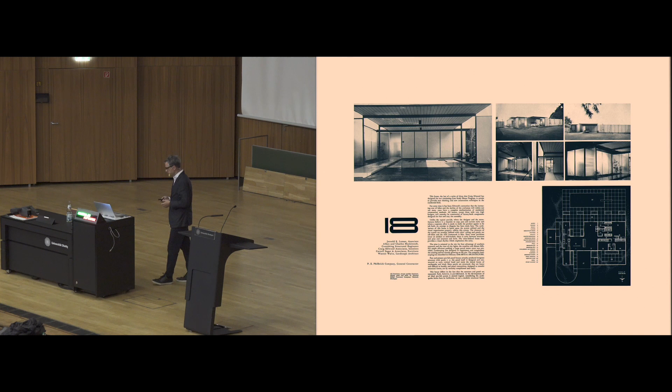We've forgotten that with architectural tools it's possible to design also tactile comfort, not only visual experience. This is something that in our case, I think we were very lucky when 15, 17 years ago we began to be concerned about sustainability and environmental responsibility. We were lucky in two conditions.

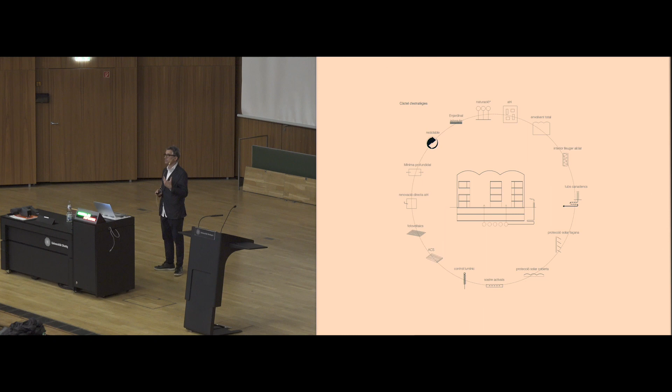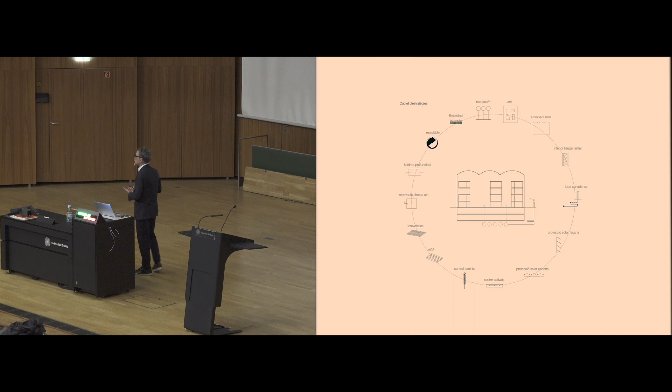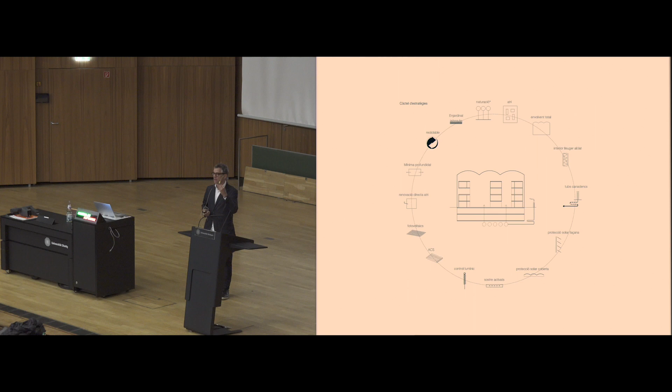On one hand, our clients were not rich enough to assume technological, efficient, sustainable solutions for our projects. On the other hand, our fees were so low it was not possible to get CFD simulations or thermodynamical simulations. That's why I think we were lucky, because thanks to those economical conditions at the beginning of the financial crisis in 2007, our only way to approach architecture with environmental responsibility was by using pure and simple architectural elements and tools.

First of all, how we use the buildings is the first sustainable strategy. It's something as simple as imagining that not all parts of the buildings have to have the same level of comfort, the same temperature, the same ventilation, whatever.

Second, a simple decision in terms of what kind of material and products we can use at that moment - not only bio-sourced materials and products, but also geographically available products very close to the site of our buildings.

Third, the use of passive strategies based on architectural decisions like geometry and material. Just by defining geometry and using specific materials with high amounts of inertia, we can get comfort based on architectural design. And if active systems are necessary, we try to always introduce those active systems into the elementary parts of architecture, like the structure or similar. This is where we are now, more or less.

But in fact, as you will see, we are really local architects. Our practice has not been far from the office - more or less half an hour by car. Well, it's not true for all projects, but maybe 90% of the projects are like that.

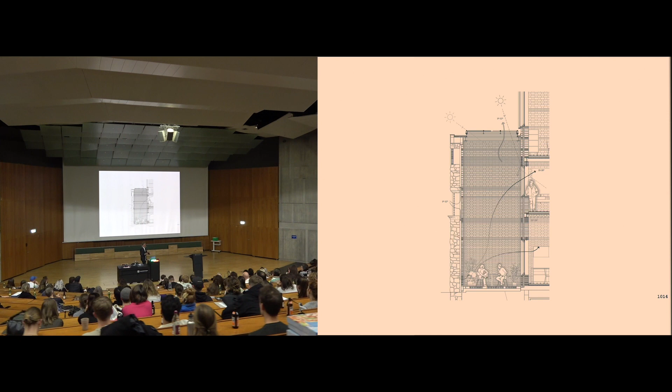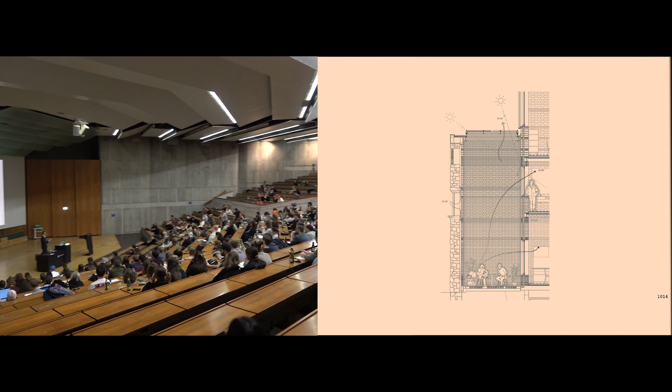In those local conditions, our thermodynamical strategies are based absolutely on the idea that the bigger the amount of inertia in our spaces, the more stable the temperature - and that needs, on the other hand, to cross that strategy with very strong and intense cross-ventilation in order to take off, at night, the amount of heat that the inertia has kept during the day. This courtyard is in a house close to the office, half an hour away, let's say.

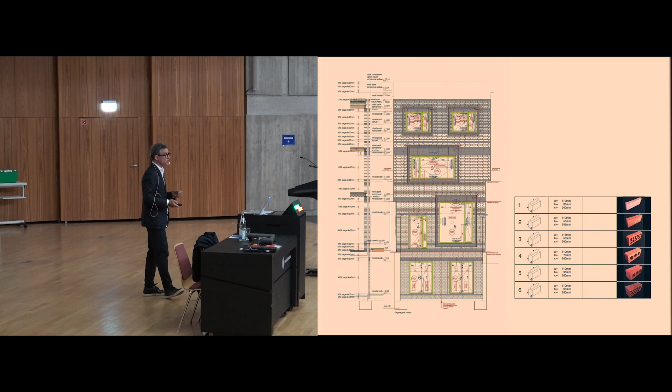From that former facade, we developed an atrium that is covered in winter and open in summer. In winter it works with a greenhouse effect, getting the sun gain. In summer the big, wide walls give a fresh and cool atmosphere to that space, which is not specialized, not highly defined by its function, but it's really special. It's a special experience because of the behavior, the material, the height. It also explains a bit the structural behavior, but that's not so important.

Also, the porch is a space for interdependence, a space where human experience is put in contact with what is happening outside of the house, not only because of the cross-ventilation, but also in the sense of a visual relation with what happens outside.

So porches, in plural, are also that kind of very special space that we've used in our projects, always in that strategy of making an intense experience based on natural conditions and comfort.

So in that sense, we believe so much in that kind of experience that it's not just a porch. In fact, in that case, it's the real sitting room of that house, which is a house for a real rich guy. But he assumed that the best place to be in winter and summertime was the porch. He's a guy who doesn't want a TV or whatever, so he was the perfect client. This porch works as a porch in summer and as a gallery in winter, but it's always the sitting room of the house.

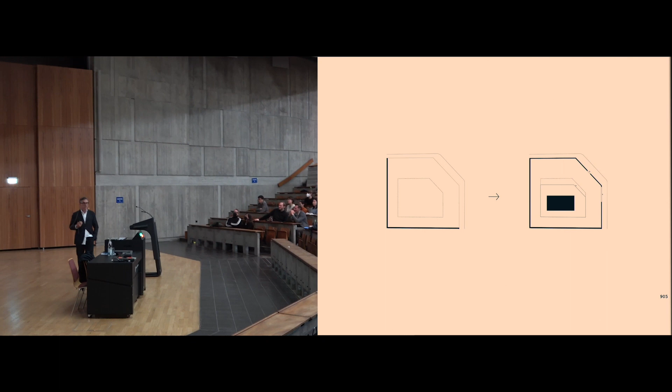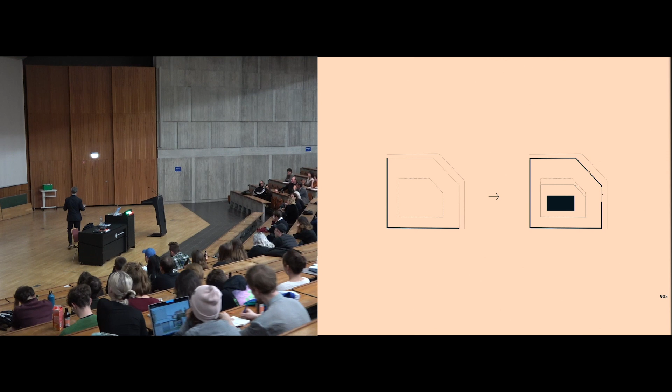In this case, the porch is the whole house. This is a completely different, really low budget example, but the plot was so narrow, so ugly, so bad-shaped, that instead of assuming the garden would just rest after the geometry of the house as basic surrounding, we decided to make the house as small as possible, assuming only the very basic parts like bathrooms and bedrooms, with the rest as that porch.

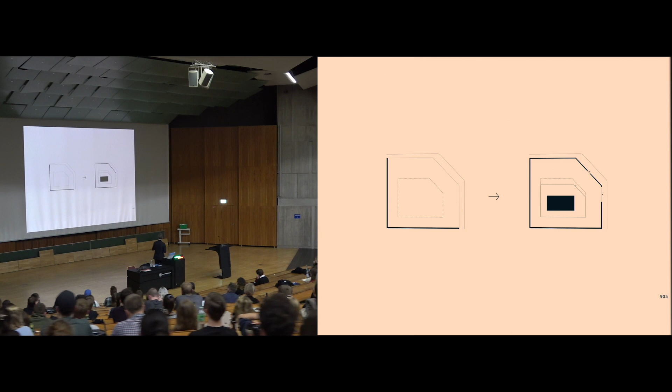It increased the perception of the garden. So it's a very, very small house surrounded by a garden, and the porch is the part that assumes the daily activities, surrounding the part of the block where the bathrooms and bedrooms stay inside. Completely open in summer, like this, and closed in winter. To make the budget as low as possible, we decided to move the metal sheet instead of moving the glass, which is always more expensive.

In this case, the whole building is a place for interdependence. The whole building provides natural conditions, different natural environments for the people working inside. The whole building works as a greenhouse in winter and as a pure porch in summer. This is a research building.

It's as easy as a building into a greenhouse. It's a real greenhouse built by greenhouse builders, so it's a very simple idea, but it works quite well. In summer it's completely open. In winter it's closed and works based on sun gains, like this, putting in relation the users of the building with the natural conditions from outside.

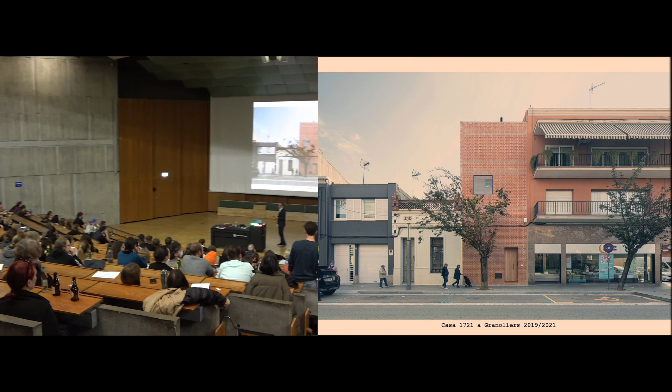So this plot is not only facing west, but you have a neighbor on the right side of the slide, which is completely hiding any possibility of sun gain, because in the south orientation of the plot, you have that ugly building 12 meters high. So it was a problem in order to get some gains from the sun and to close the house to the west.

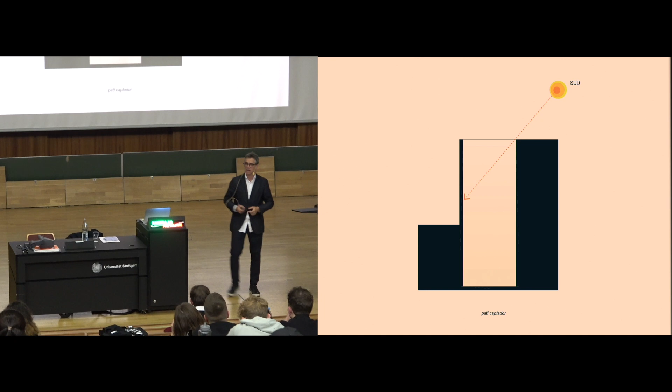That's why we decided to do something really special, really strange for it's a house for one single man family, because he's divorced, he has a girlfriend, he has a daughter, but most of the days he lives alone, so it's a small house.

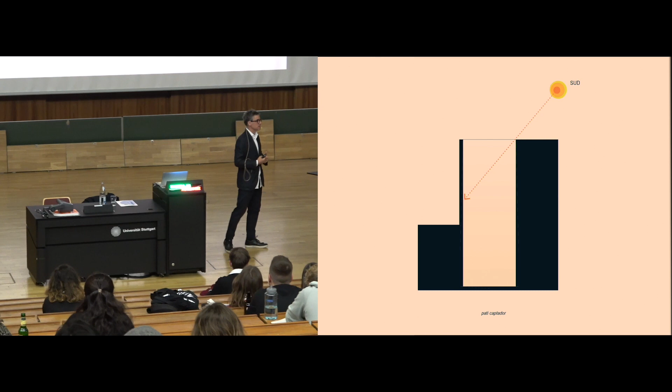But just on that thermodynamical conception, and also always trying to find out that idea of a very special and intense experience, we decided to propose to the guy that strange space as high as the neighbor in order to get sun gains from the rooftop, from the skylight. So that means you're producing a very special space, 12 meters high, non-programmed, non-functionalist space, just the space where whatever could happen, absolutely close to the west, but absolutely open to the sky in order to get that sun gain in winter.

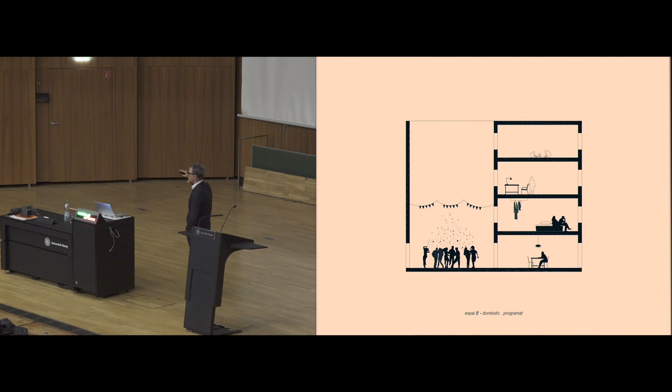Of course you need the house for the single one-man family. So as he doesn't want to have that sensation of being alone at home when his daughter is not there or the girlfriend is not there, we proposed to put one bedroom over the other, to avoid that sensation when he's alone that the bedroom at the other side of the stairs is empty. So his bedroom is the first one, the daughter's bedroom is the second, and for guests, the third bedroom.

So it's a very vertical house, but he can be living just with the street level floor and with the first floor.

Then, of course, that thermodynamics shows up. That very vertical space is not only about the experience of verticality, but is also a natural engine to promote and help natural ventilation, not by opening to the west, just by the sun, by the chimney effect of that vertical space that helps convection and emphasizes the ventilation of the house.

So this is a very special space at the very entry of the house, and if you look up to the skylight, it's like this. It's a really intense experience, it's really beautiful.

And he's, you have to imagine, he's an apothecary, a chemist, a very traditional guy. He's a friend of mine, but he's really traditional. He always wears ties and is very elegant.

But he was confident enough in our proposal. He was unable to imagine that space - it's impossible to imagine this just by models or drawings or whatever. But the reality is that he's absolutely in love, not only him, but the family, the friends, to make parties here, to have that experience of the skylight and whatever.

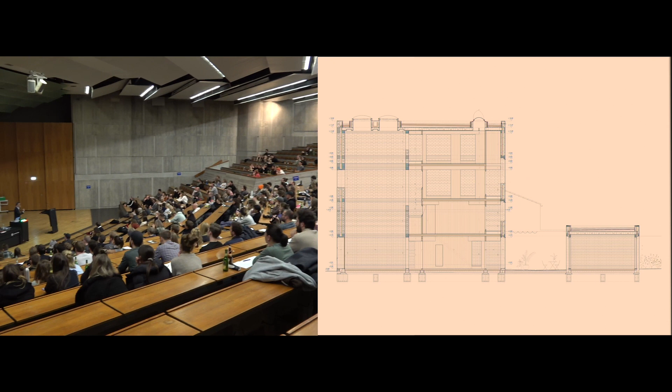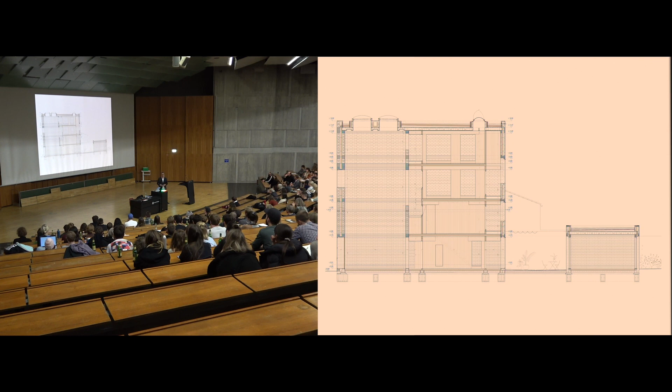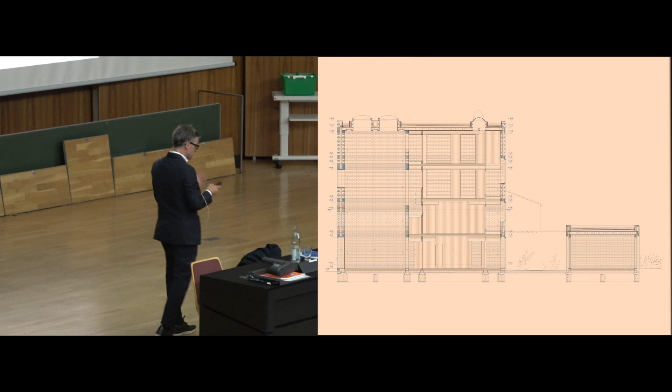The rest of the house is absolutely the opposite. It's absolutely cozy, absolutely small, absolutely comfortable because it's the bedrooms, and as this space is based on inertia and also a heating pavement, the rest of the house is based on pure insulation. It's absolutely protected by a double layer of facade and gallery. So all the bedrooms are double protected from the outside, and all this part is made with CLT timber panels.

These CLT panels came from Spain. At the beginning of our office, when we began to work with CLT, we began with Austrian and German producers like Binder or KLH. Now we are working with factories from the north of Spain that have begun to produce CLT timber panels on pine, not spruce, and we prefer that. Well, the rest is not important - the strategy is like this, and the house is quite beautiful and whatever.

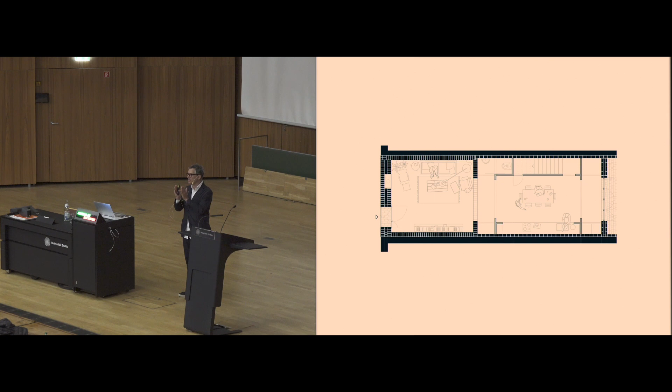The other thing that is interesting about this house is that it's really small, very simple, as you've seen, and it's very Euclidean, very orthogonal, so simple - the huge space, the bedrooms. What for me is a big discovery is that in general that kind of attached typology is always based on the staircase being in the middle of the house, working in the traditional and vernacular attached houses as a natural chimney for ventilation.

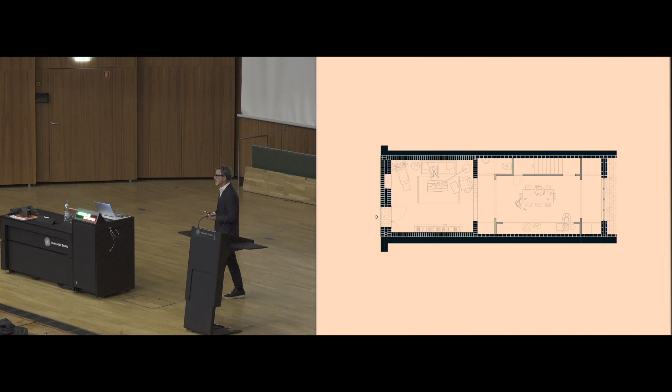But this kind of staircase means that you lose the length of the house. So we decided here to put the stairs surrounding the bedrooms, changing position on every floor, so as to avoid the sensation that there's a specific space for the stairs.

So the stairs begin like that, then turn on the left, and then turn again. So the staircase is changing its position every time.

We use the space under the stairs to put the WC on every floor, because the bathroom is always located in that gallery. So all the bedrooms are related to the outside through the bath area, which in general, in terms of conventions in Spain, is like pure evil. But in that case, again, that elegant, traditional, conventional man feels absolutely comfortable with the idea that his window is a bathroom.

So the stairs are like this, surrounded by that relation with the big space surrounding the bedrooms. At the end, the cozy bedroom with the gallery at the end, where the bathroom is.

That idea I was explaining at the beginning, our challenge, is to put people's experience in contact, in touch, in that relation of interdependence with something that is bigger. This is not only about natural conditions and physical phenomena. It's also to make people aware about time. Time is something really big. I'm not talking about time in terms of poetics, I'm talking about time as a real vector that is part of design.

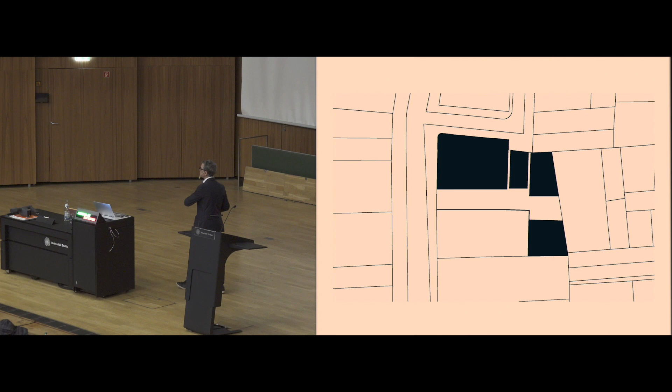So what we decided is that part of the building was still really capable of assuming new programs, but part of the building would be far more useful if we demolished it, in order to produce a new space that gives new and necessary attributes to the former spaces that remain. So basically, we provided that section, demolishing the right part of the building, which was as old and as culturally interesting as the rest, but in terms of geometrical availability was not as useful as the part we kept.

So the former spaces remain, maybe with new attributes for the new users, but in terms of geometry this was perfect for a rehearsal room or whatever. The new space gives new attributes to the whole building by getting sun gains, natural ventilation, circulations, and providing that sense of the street coming into the building.

Time is not only about memory. The previous example was about working with memory, with heritage. But time is also about behavior, as I've said before, because we work a lot with thermodynamics concepts, and this is about time happening, one thing after the other, one thing after the other.

This is a very clear example of that approach. This is a building that is basically an adult school for elderly people, and also people who want to learn Catalan and something like that.

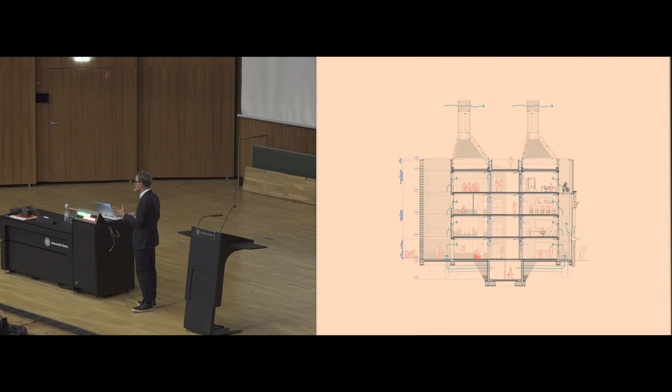It's an equipment, a facility, a public building, and it's very simple to understand. We want it to work by its nature, by natural behavior, based on inertia and natural ventilation. The big challenge was that we're not only getting comfort with that passive strategy, but we're also moving all the air for renovation, for healthy air, based on a natural engine.

Which is the sun chimney you can see at the top of the section. This building moves in summertime 15,000 cubic meters of air per hour, thanks to a natural engine. So the building has no fans to produce HVAC or artificial air-conditioning, and no fans to move the natural ventilation for air renovation.

The air comes from outside, moves through a large path through the basement to get a more stable temperature. Then from the basement it comes into the courtyards, and because of the natural engine that pushes up the air through that physical phenomenon - the sun chimney, which is a greenhouse effect, a Venturi effect at the top, and also a chimney effect - the difference of air pressure helps move the air. So thanks to that natural engine, the air can cross the classrooms and go up.

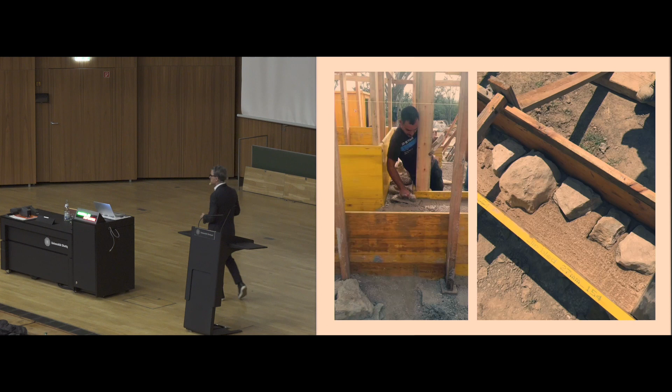To be in touch with that group of elements bigger than human beings, like natural conditions and time, is also to talk about social, economic, physical resources - to be in touch with what's happening around us in our societies, our villages. So it's to be in touch with traditional constructive processes, with geographical resources that are available.

But it's not only that obvious image of a worker, handcraft and so on. It's also about the idea of mass production, prefabrication. This is also about resources, about products, about preexistence. The products already exist - the designs, the profiles, the prefabricated systems already exist before we begin a design process. So it's also a preexistence, something we have to be aware of and concerned with.

This is dealt with in the school where we teach, where we learned - it's 15 minutes from the office. Our students live here, and the four of us are alive, which is good news - it means the building more or less works all right. This was a competition we won with friends of ours, dataAE.

I present this to talk about resources, but it's a prefabricated system, so it doesn't look like the beautiful picture of a worker placing stones. But a prefabricated system is also a resource - something that exists, something we have to deal with. We can take the best of it. It's also an example of a different idea of a symbiotic strategy when talking about resources.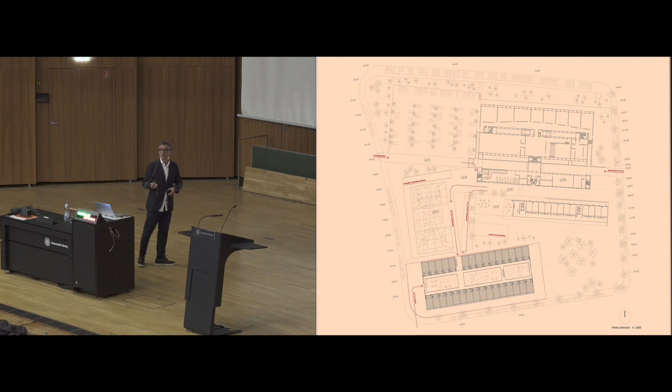We won because in the jury, the constructor was present, so he was absolutely happy with our proposal since it was the lowest budget proposal. But this lowest budget was based on, I think, really efficient strategies.

The basis of the competition asked for studios, gyms, a cafeteria, a bar, whatever. But it was a silly basis when we were so close to a building that already has studios, a cafeteria, everything. So our first decision was to take advantage of the former school's existing program, transforming it into a resource for the project.

In terms of water, we wanted a lot of garden, a lot of green in that new dwelling for the students. So we proposed to take advantage of the huge roof of the former school.

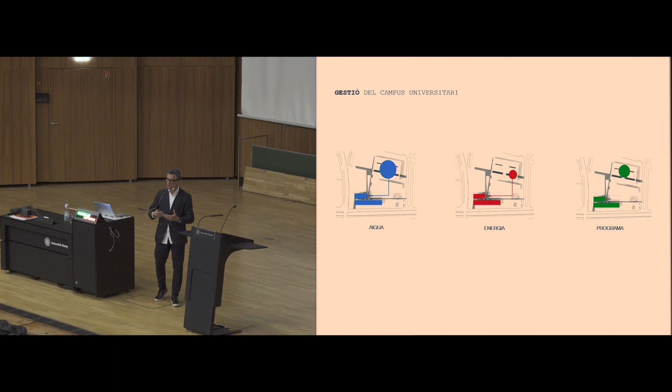In terms of energy, we developed a symbiotic idea based on a very simple question: during the day the students are at the school, during the night they're at the residence. So it's obvious we can use the same heating system of the school to provide comfort and heat to the new dwelling. It was the hardest part, because the owners of the buildings were different, so it was very tough to make them agree to that obvious decision. In the end, it worked.

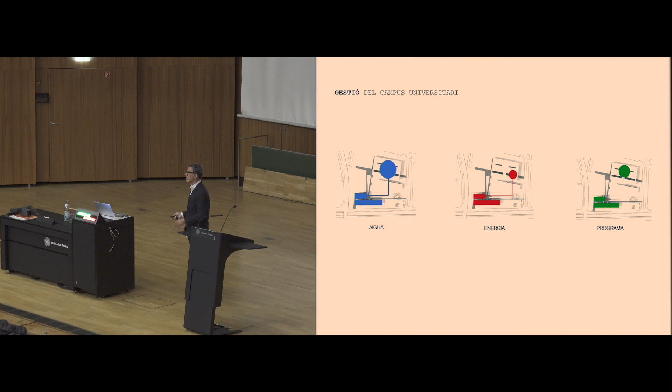So this was the first idea, and these drawings are from the competition, explaining that basic concept of taking advantage of existing resources in the plot, understanding the existing building as a complete resource.

The other element of the competition is that it asks us to work with a prefabricated element that exists in Barcelona, with copyright, coming from a factory. It was part of the competition, so we had to deal with it. It was a three-dimensional prefabricated concrete element that works like in a factory, like a car construction process. Every day the element moves one step to introduce the kitchen, the facades, and so on, then you move it to the plot and place it.

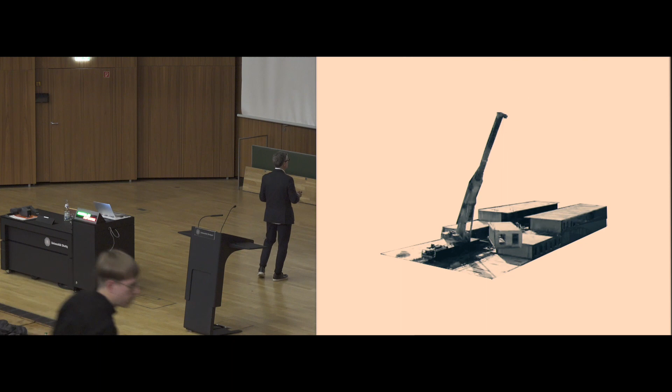We did just a 2-floor building in order to avoid the elevator, saving on budget, so the promoter was happy again.

With that already existing product, the compact habitat element, a 3-dimensional prefabricated concrete element, we worked with their engineers to show the element as it is. The original design of that prefabricated house was meant to not be shown, because in the engineers' opinion it was too ugly. So they defined a concrete element that always needed to be coated, protected with plaster boards, because otherwise the acoustic insulation doesn't work, the fire protection doesn't work, and so on. For us, it was absolutely silly, because the beauty of the product was already there, clear to us.

So when we won the competition, we worked with the engineers to add an extra bar here, to make the concrete more efficient, to change a bit the dosification of the concrete, in order to have a legal constructive element that meets all the norms but can still be shown as is. With that basic idea: if we have architecture students, we don't need to give them anything more than a pure support, a pure structural, geometrical support to be colonized and developed on their own. So we basically proposed geometrical conditions where 2 bedrooms can be achieved, or 1 bedroom, a big living room, whatever, and they decide how to really develop the space just with furniture.

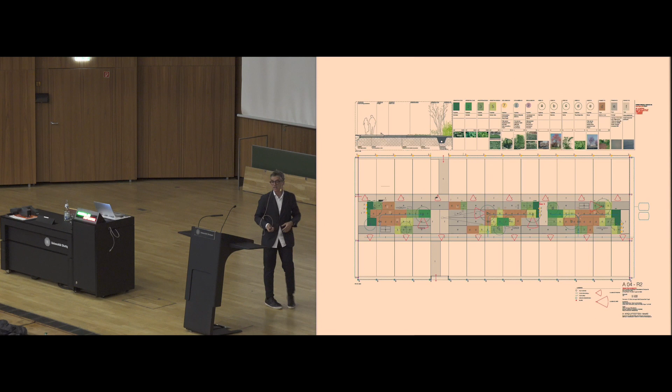The same idea applied to the garden — just a pure empty space, designed with conditions to make it more green, thanks to the water from the roof of the school. The same with the facade, and so on.

So this is about resources, but not in the general, beautiful-sounding way people talk about when they see our architecture — that idea of local resources, traditional construction, and so on. We did that school very based on a prefabricated system, and we dealt with it the same way. Our approach was basically the same: to take maximum advantage of the nature of the elements we work with. So if the element is based on concrete, then we need the inertia again.

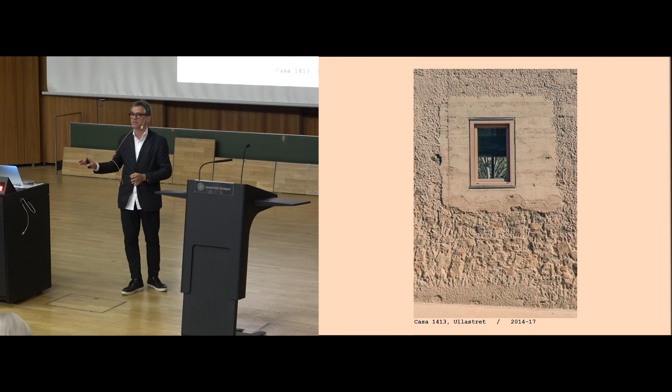So we have to take off all the plaster boards because the inertia will help bring back the comfort.

This is a different case. This is a house in a beautiful old village in the Catalan coast called Ullastret, with beautiful narrow streets, old houses and castles from the 13th century, a really nice place to go. We had a commission for a weekend house on a beautiful plot.

It had an incredible wall surrounding it, because it was an agricultural orchard, a vegetable plot. It was surrounded by this beautiful wall, 3 meters high in some places. The council norms in that place asked us to make what we call a 'crocanti' facade, simulating stone, to be in mood with the surroundings.

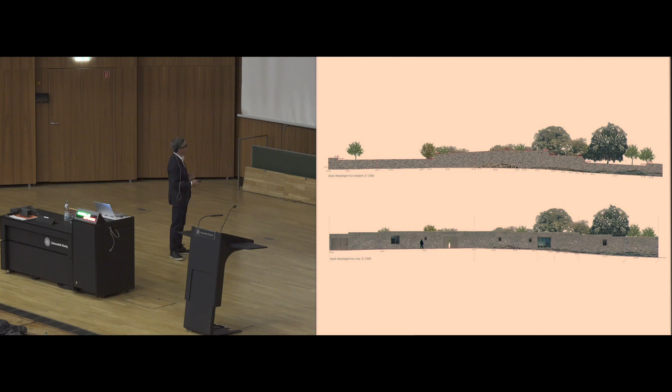So it was easy for us because the answer was clear. As we had that beautiful wall, the house was going to use the wall in a structural sense, as an inertia element, and also as a facade, since the council norms asked for that. So we developed a very simple house attached to the former wall.

The problem was that when we went to the council and asked for permission, the urban plan said the street was too narrow for the trucks. So the wall had to be demolished, removed, and replaced in a new position. After a first big crisis, crying and whatever—we're always like that, very excited, crying.

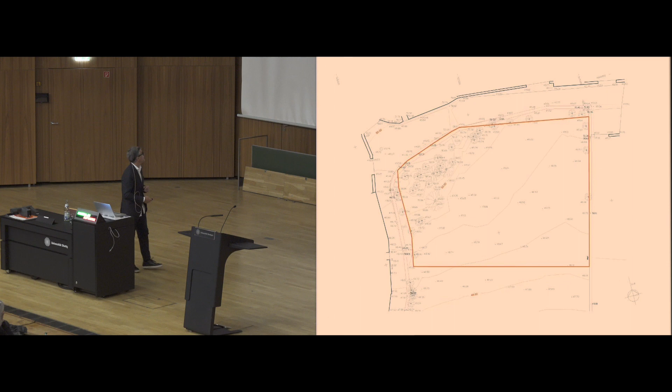So we decided that maybe in terms of geometry, the attributes of the heritage would move on, because the geometry won't exist anymore, it will disappear. But in terms of inertia, in terms of structural attributes, the stones still remain with those attributes.

So we decided to rebuild the wall 1.5 meters beside, with the idea not to build again a stone wall, but to build something like a mix between a rammed earth wall and a cyclopic concrete structure. We used the former walls to build that wall based on the former stones with lime cement, placed in a rammed earth strategy, also mixing this with insulated air glass balls in order to put air into the wall.

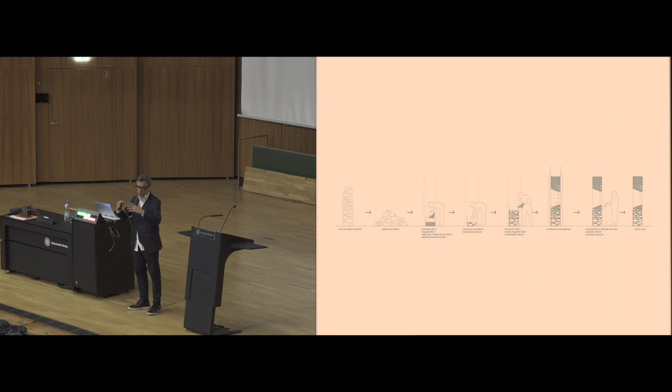That means that with a 50-60 centimeter wide wall, which is really wide—not something that can always be placed on different plots, but here was possible because we had plenty of space—it gives us enough insulation to develop a one-wall house. This is a non-layered wall house, just one layer wall, okay?

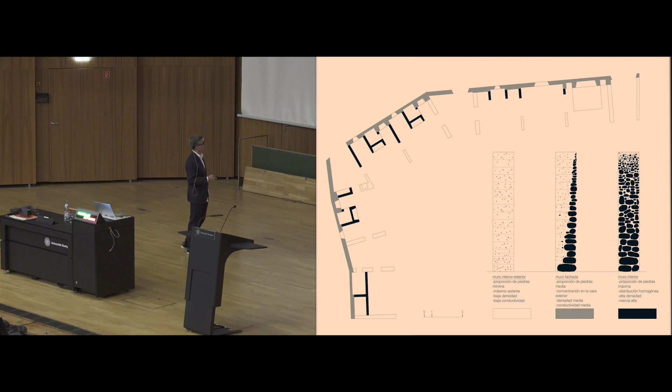At the end of the process, not all the walls have the same density of stones, because it depends on the structural behavior and also the thermal behavior. The typology is very simple, very obvious. Remember it's a weekend house, and we have a good climate, let's accept that.

So you have to go through the garden if you don't want to cross through the child's bedroom, if you want to go to your own bedroom or to the guest bedroom.

This is the rammed earth process with the former stones placed with the lime cement. And this is the final part, where when the casting system is taken off, we just pierced the surface in order to show again the former stones that at the beginning of the story were 1.5 meters in front of that position.

So it's a little bit the same again—our approach to heritage is not about culture, it's about attributes. So if the wall is not again in the same place, but still retains certain attributes of the wall in terms of structure and inertia, we take advantage of that.

So this is, as you can see, the original position of the wall, and this is the new one. On the other side, it's not really important, it's quite obvious—it's like a porch facing south, getting advantage of the sun again.

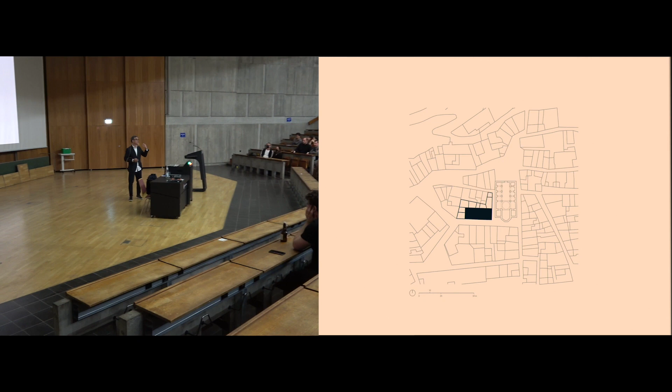This area is very traditional—the cellars, the businesses, are really small, family businesses with short productions. Not all of them, but most of the cellars are really small. And the tradition is that the cellars used to be in the basement of the houses, not in the middle of the landscape or the vineyards, but in the middle of the village where people live.

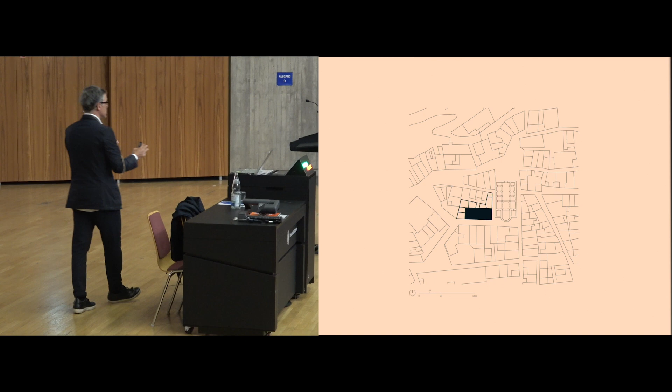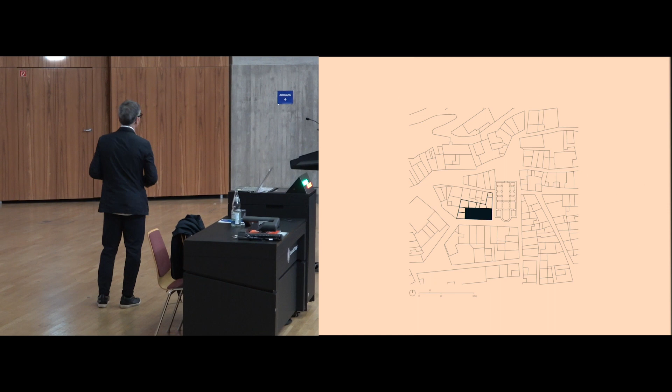So in that same sense, the owner of those vineyards decided to promote a new cellar to produce more bottles, 75,000 bottles, which is still really small production. To do that, he bought attached plots in the middle of the village, close to the beautiful church of that place. The norms were so simple.

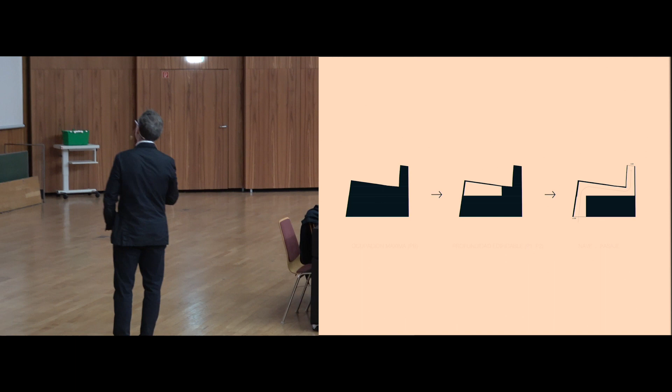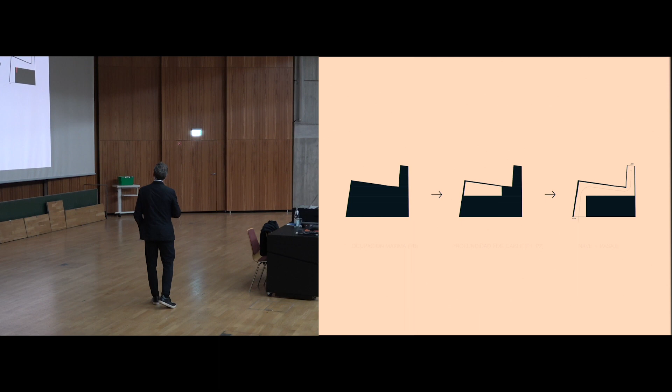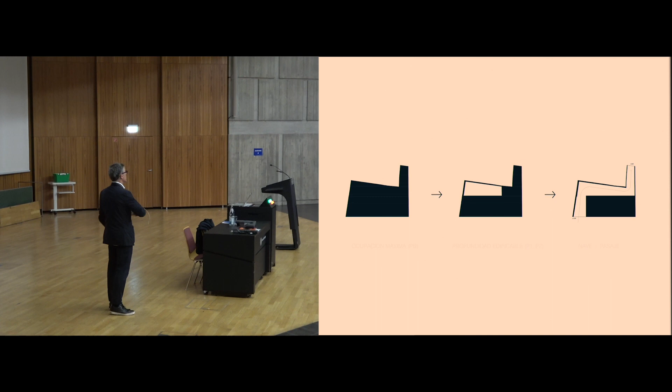You cannot complete the plot, you have to keep some distance from the neighbors. We decided to have the same distance across the whole plot in order to have a very regular, very orthodox, orthogonal geometry for the productive part of the cellar, and to use the rest of the geometry for logistics—the coming of the grapes, the going out of the bottles—and also the social part of a cellar.

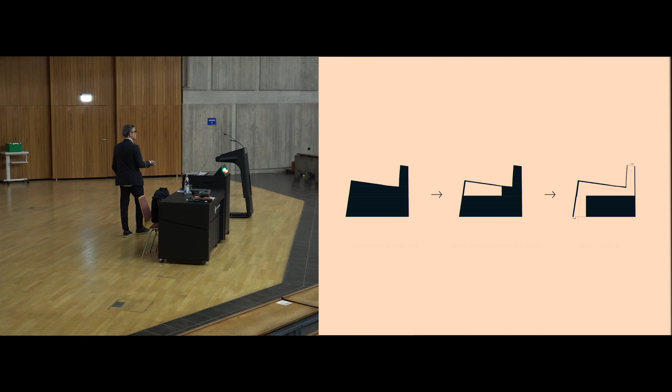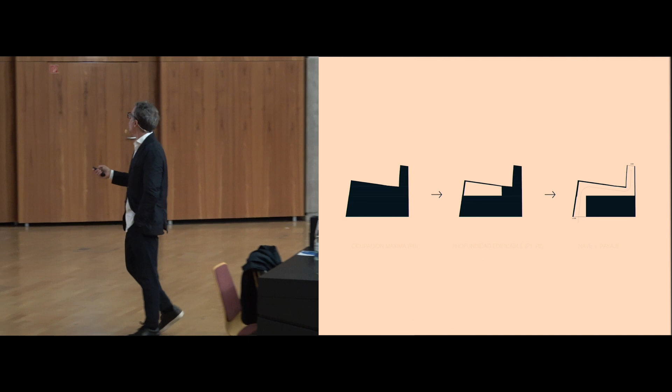Nowadays, the social aspect of a cellar is more important every day, the commercial part, having a small bar, whatever. So we did that, but we also asked the council for permission to cover a little bit of that part with roofs, to protect a bit from the rain, and they accepted that solution.

So we have this very elementary geometry, very tall for something I'll explain later, which is again about convection, and the rest is a very open space for the logistics and social activities of the cellar.

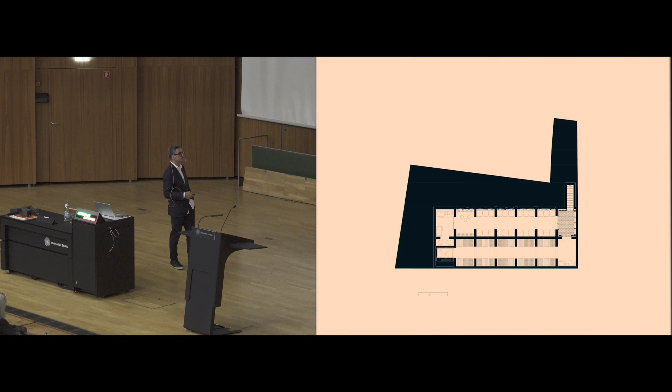The basement—what's the name for that—well, a basement with typical wood bats, not bat, but whatever. Then the vatting rooms where the vinification happens, and in parallel all that logistics and social path. Upper levels are just for auxiliary programs like an office, a tasting room.

So this is the big volume, just close to the church. This was beautiful because it's not very typical, at least not in my part of Catalonia, but in this village one of these plots used to be a fronton, that kind of game very typical in the Basque Country, where they play with a ball against a wall. So the first wall was already there—part of this wall existed because of this playing game, this pelota court. But here you have the vinification building and the space in between.

The funny part here is that we always work with bricks—we love bricks. Well, not always, but we work a lot with bricks, red bricks and special bricks, whatever. In this village, bricks are forbidden, because for them it looks too much like a cheap farmhouse, for pigs and that kind of thing. So for them it's a prejudice they have, that bricks are for pigs and not for people.

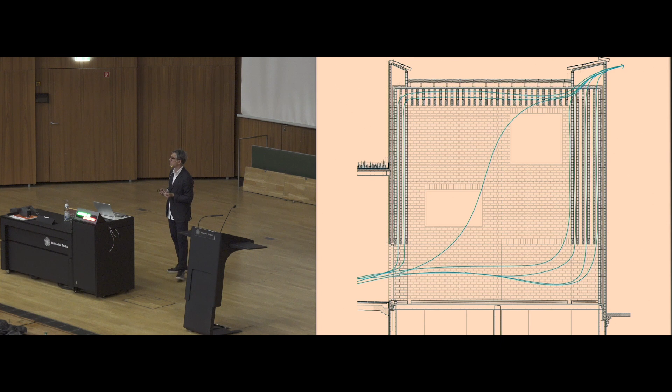But the thermodynamical relation to get an advantage from the inertia is not only based on the mass or on the width of the walls. It's also based on the surface of interchange, because if the inertia is that big invention that keeps the excess of heat in summer and gives it back in winter if you're close to the sea, or gives it back at night if you're in just a simple building, you also need the maximum surface possible, because it's in the surface where that interchange is happening. So that's why we've done these structural walls divided by cells in order to not only have inertia, but also to have as much as possible of interchange surface, okay?

So this is the invention, but the natural behavior is very simple. When the outside conditions are positive, are good, the windows are open, and you have natural convection because of the heat that moves the air, and that's all. In summertime, the natural conditions are only good at night. So at night, in this place, we are basically under 20 degrees, 20, 21, 19, 18.

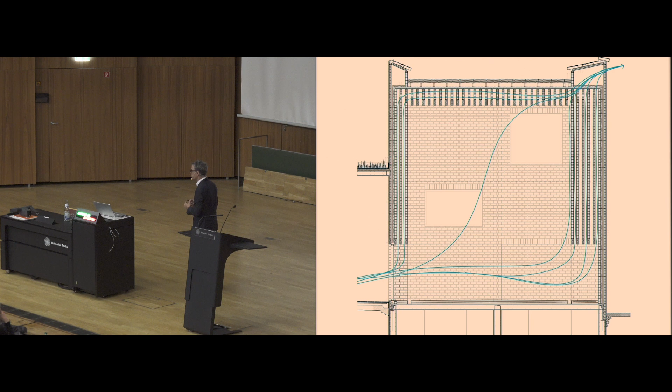So that's the moment that you really can open the windows, okay? And the convection happens and so on. But during the day, it's so hot that you have to close completely the building and get the advantage of that inertia that you've been refreshing during the night. So it's like that intense and a little bit bizarre aspect of a building wall, but it's not only the walls that are like that, also the roof structure is the same.

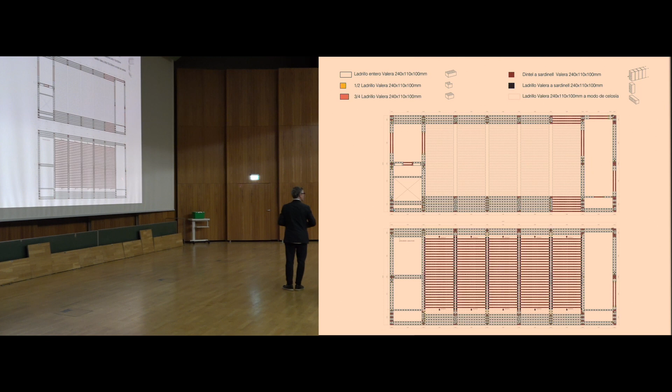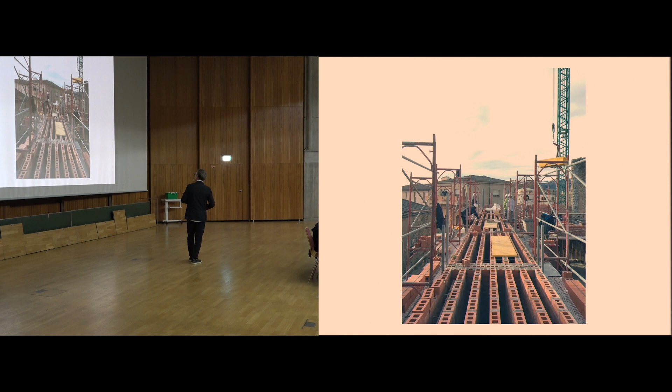Here you can see the constructive process, standing up the walls in front of the church. There's also an insulation layer on the last layer in front of the facade. Here you can see how the walls are open to the space to produce the beginning of the convection. But also the roof has the same system with beams, the bricks over the beams are also pierced.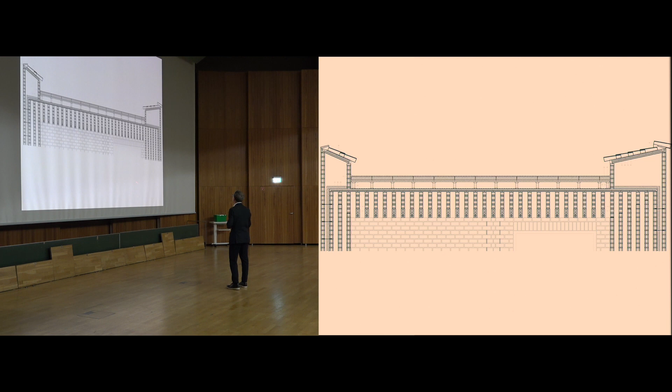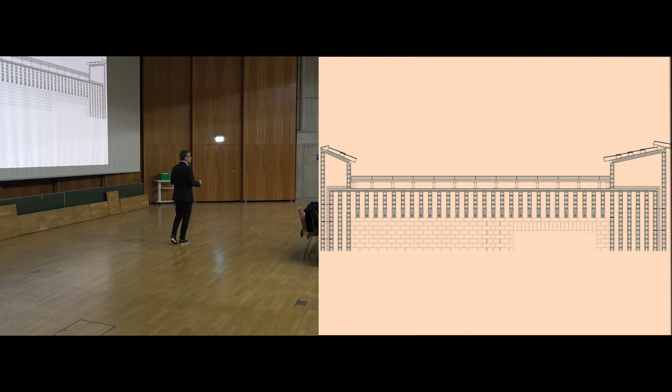In order to let the air move through the structure, here you can see how the cells go up and how the roof system is also open to produce the movement of the air in this position, because here there's a lot of inertia too, so we have to take advantage. We want to move the air and touch as much as possible all the surfaces of the structure, because that's where we can keep the hot or keep the fresh.

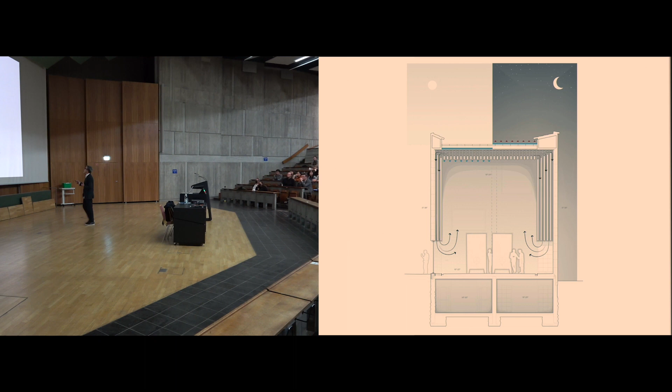This is a beautiful space. It's high because of the convection, nothing else. And we can say that it's not only under 24, it's under 21 degrees. So it's really stable during the summertime. It's really, really stable. The final and bizarre invention is that all that, the sun chimneys, all this is only possible...

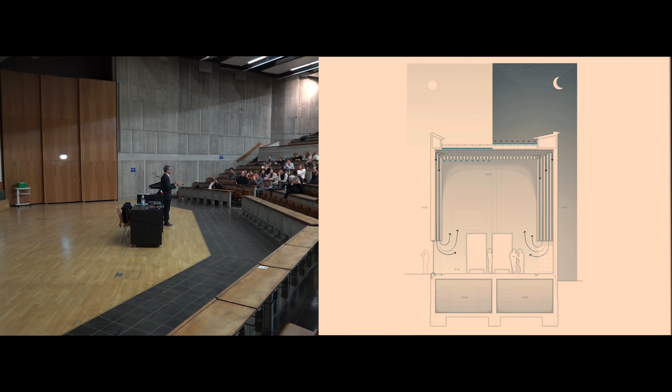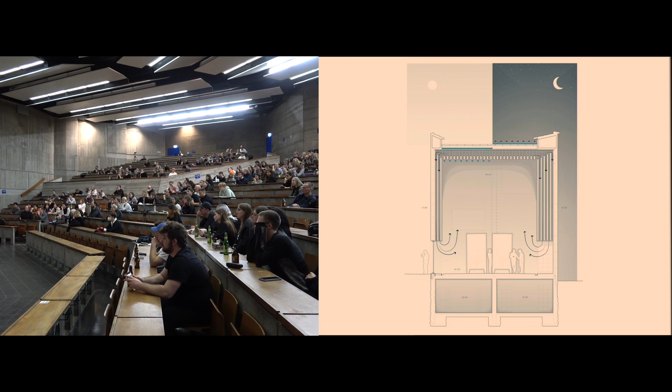I haven't talked bad about engineers. I always talk about engineers in my lectures, but at the end I always say the same: to do that, it's only possible with engineers. We have the thermodynamical concepts, basic concepts in terms of thermodynamics, but we need simulations to check that all this will more or less happen.

At the beginning of our career, it was not possible, so we were very basic: biospherical material, cross-ventilation, inertia, and so on. But to do something like that, you need friendly engineers, which is not common in Spain, to check that this is possible. The kind of engineers that understand that comfort needs engineering, but doesn't need engines, which is quite surprising for an engineer. But it's like this, because we need their wisdom, their calculation, their simulations, but we don't necessarily need engines, because engines are not about architecture, and we are architects.

The invention is that in front of the sky, which is the infinite amount of inertia, is the direction where we lose more heat. That's why we have hair, that's why bald people use hats, that's why people in north of Africa sleep on the rooftops, because it's in front of the sky that you lose more heat.

So what we developed in this building is that pool with a layer of water, that during the night, the water is in that position, losing heat to the sky. During the day, the water goes down to this chamber, absolutely cold, absolutely fresh, in order that just by conduction, because it's in touch with the structure, to make the structure cooler, colder. That makes a magic thermodynamical moment where during summertime, the air goes up, but then goes down, because it's fresh enough to move the opposite movement, which is quite intense, really interesting.

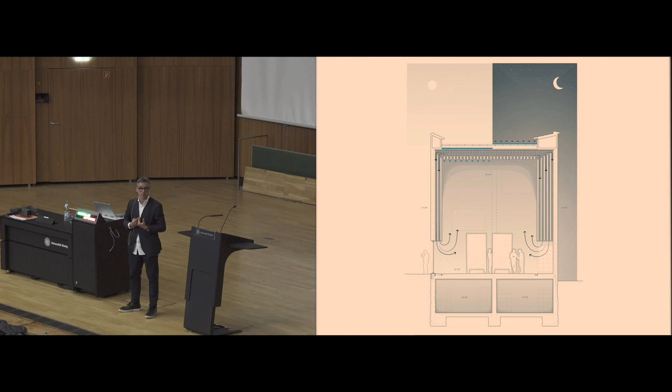That's why we are getting less than 24 degrees, because it's not only about the inertia, it's also about the freshness of the sky. And for me, this is not for people, it's for wine, but this is the final example I want to show you about that idea of interdependency, about putting in relation the human experience, or the grape's experience, with something that is far bigger than us.

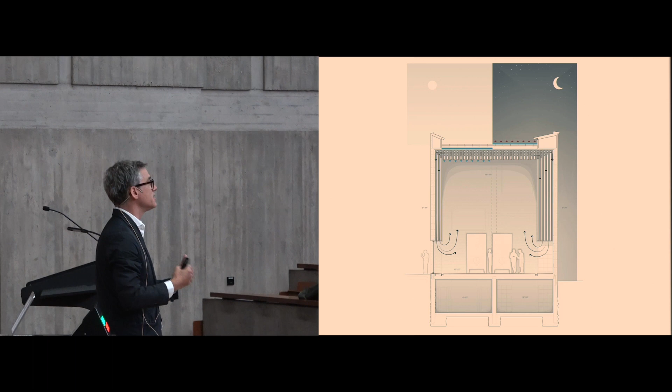I'm not against the human scale, but what I have to say is that when you feel in touch with something that is so huge, so large, so bigger, so infinite, then the experience becomes a real emotional experience. And we are not just talking about survival, about shelter, about habitability. We are talking about real luxury, which is the luxury of that kind of feelings, that kind of really strong and tough experience. So with that beautiful final concept and that final pool picture, I end, and thank you very much.